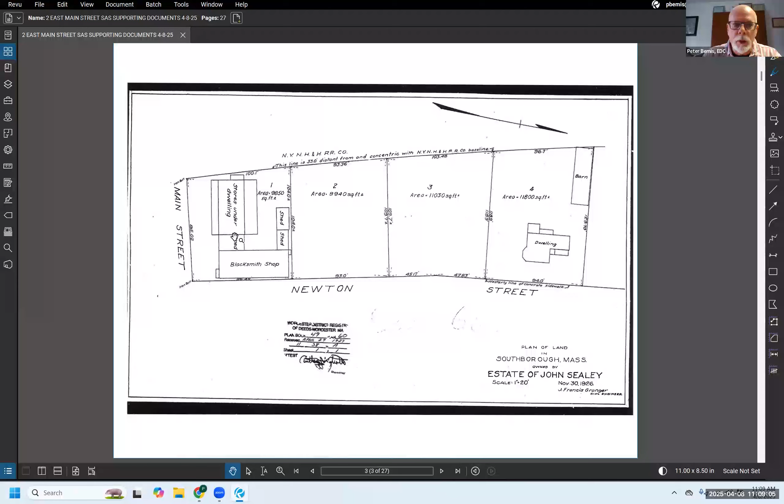The reason why I know there were some apartments up above is that I've been approached by some folks, actually a gentleman who was born in this house. So we know people who were living there.

So going back to the flows again, we established these flows back when we initially looked at this project. We had about 1,800 gallons, or 1,180 gallons per day, if we were looking at it in the 20s with the various uses that were there. When the printing press company was there and the gas station, it was about 900 gallons. When the gas station expanded, we had about 900 gallons.

When we came forward in 2018, there was no such thing as mixed use office or residential. We were trying to use a provision in the zoning bylaw, because this didn't even exist. And now here we are today, and I'm trying to justify the 880 gallons per day, which is 8 one-bedroom apartments.

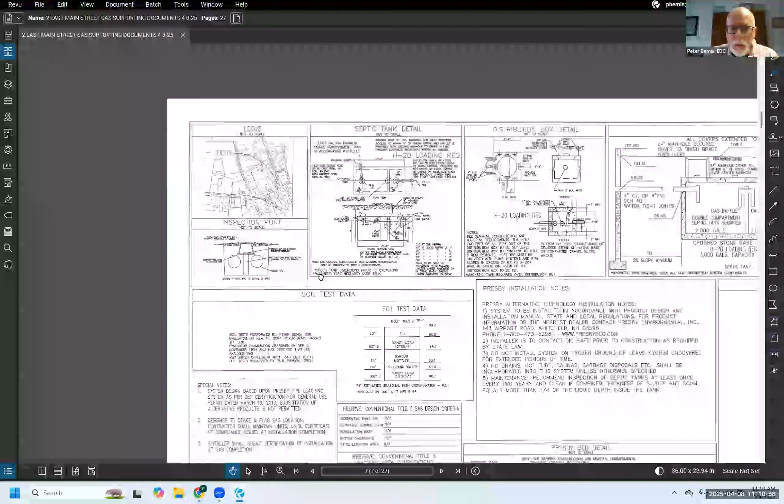And then this is the soil absorption plan as it's currently approved. These are the leaching limits for the Presby system that we got approval for, and that's 14 by 58.

And then this is what we're looking at today. Again, this is the overall plan. If we zoom in here, this is the limits in red of that 14 by 58. This blue is the area that would be added, and this small strip here is the 75 square feet to be deleted. So the net increase to get to the 8 bedrooms would be 143 square feet.

So I kind of described that.

Explain the flows. So again, going back to 2018, the downtown district didn't exist. We pursued permits for a mixed-use residential retail facility, where we got a use variance from the Zoning Board of Appeals for 4 extended stay units on the 2nd floor and office retail on the 1st floor.

We got support from various factions in the town, but rather than pursue that special permit with the variance support, we went forward with a by-right use, if you will, an office building. But we needed a special permit for its size, and unfortunately that was denied in September of 2019.

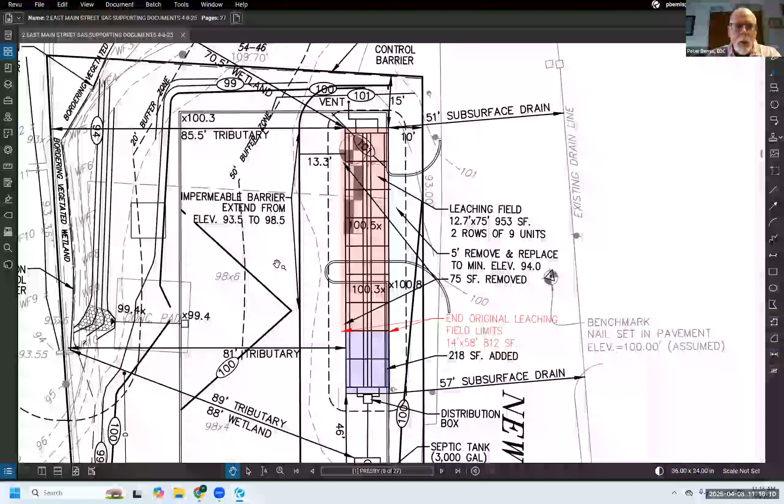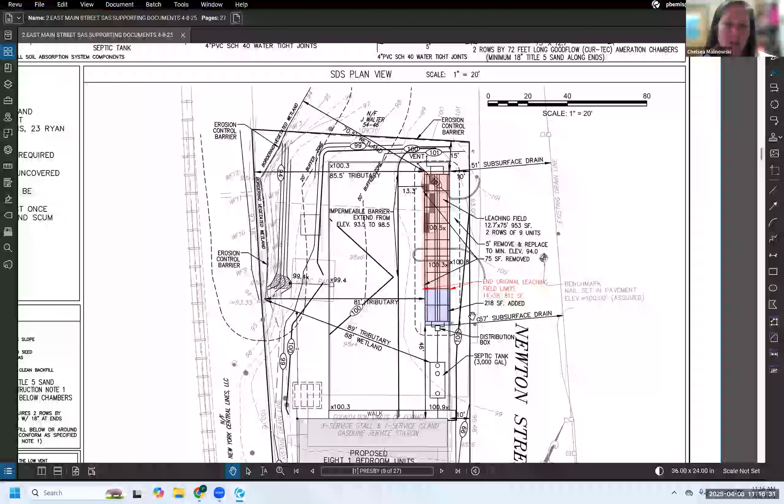Let's see here, I think. Peter, before you move off that plan, can I ask a quick question? Sure, go right ahead. Can you restate the increase of square footage between the original pink color and then the addition of the blue less the 75?

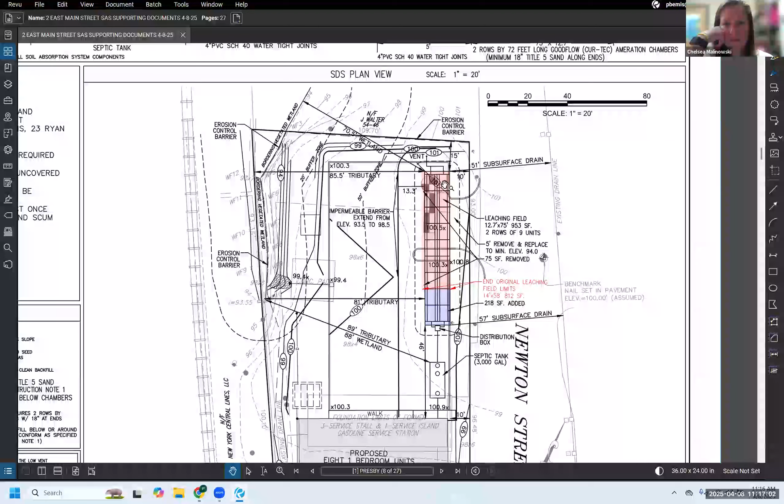Right, so this original area was 800, and I wrote it down. I didn't, bear with me, I just have to take off my glasses and look at my screen more here. Concerned about just the increase. I know, but I want to make sure I quote this properly. Okay, it was 14 by 58. Yeah, 812, I just want to make sure I got it right.

So 812 was what the original approval was. The new limits are 953. And the delta here is that we take 75 off of the original 812 and we add on 218, which gets us to those numbers. So that's really the difference: it's 143 square feet of added area right here. Okay, got it, thank you.

And so the GoodFlow Solutions technology, it's an aeration chamber or galley, depending how you want to look at it, with this added feature that it has a fin attached to the side of it. So this is basically the chamber we traditionally had been familiar with, and then they've added on this fin-type structure along the edge. It gives it more air and distribution capability.

One thing that Dennis and I have done, we submitted an original plan with this, we talked about it the other day, and what we're going to do is run a pipe through the leaching chambers, rather than it just enter the chamber and then drop into the filter bed. We're going to extend the pipe through the system so it'll carry throughout and distribute more equally throughout the chamber area.